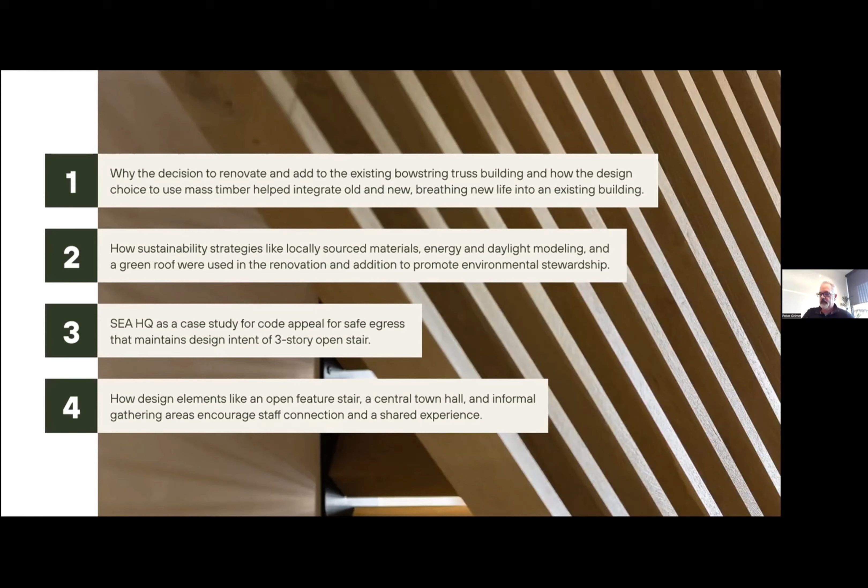So with that said, let's go ahead and dive into the first one. How did we end up where we are today? This was our building in 2006. Prior to that, we started in 1998 as a 2-person shop over in the Pearl District. Our founding partners, Sid Scott and Kelly Edwards.

I joined them about a year and a half later, and we had about 5 folks in a small startup in the Pearl, which we quickly outgrew, and then we moved to the West End, basically downtown next to what's now Providence Park. Go Timbers and Thorns. We were there until about 2004, at which time we embarked on finding a new home and found this building in 2006, moved over. At that time, I think we had about 17 folks on staff.

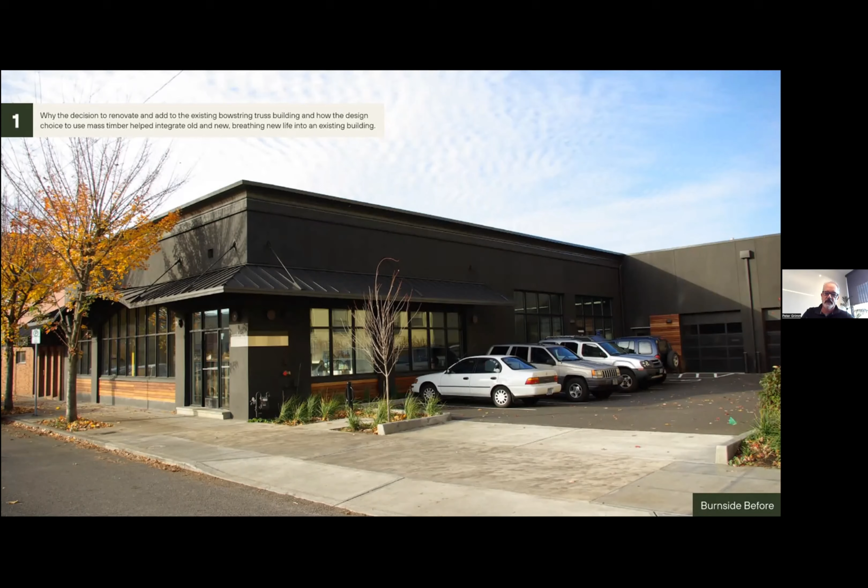The building had been built in the 40s originally, with beautiful bowstring trusses on the interior. I think in the mid 90s there was a storefront project done on the exterior that gave it its character. But really just a cool semi-industrial vibe, which was part of our ethos from day one.

Very comfortable, great light, really great neighborhood, so I can't stress that enough. We're on 26th and East Burnside, just below the Laurelhurst neighborhood. It's a wonderful community of truly mixed use—restaurants on 28th, housing, single family, multifamily, office space. It's just an integrated neighborhood, and we really love that about it.

Over the years we grew. As an industry, we had a bit of a tailwind from post-2008, up through the mid-to-late 20 teens, maybe even up to COVID. So we grew and grew, and by about 2016 we realized we needed a larger home, a bigger shell. We struggled with how to achieve that on our existing site because it was a 1-story building, not a large site, and we really didn't want to demolish this beautiful old industrial shell.

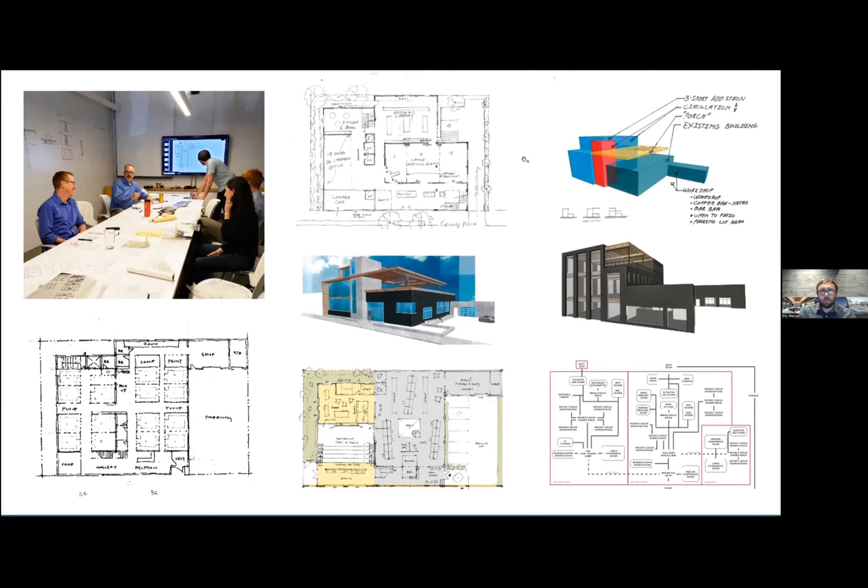So we were happy that we could keep this space, and with the opportunity to go through the wall here and interconnect into our addition, we were really excited about doing that. The design process really entailed going back to those goals and incorporating all the feedback on how these two buildings could interact with each other.

Again, it's like we have the old on one side and the new. As part of the charette, we talked about mass timber and really wanted to use it, though we didn't know what kind. We wanted it to help tell a story between the old and the new, because in the 40s bowstring trusses were really popular, being built all around town, and highlighting this as an advancement of wood technology between the two. We thought that was a really cool opportunity.

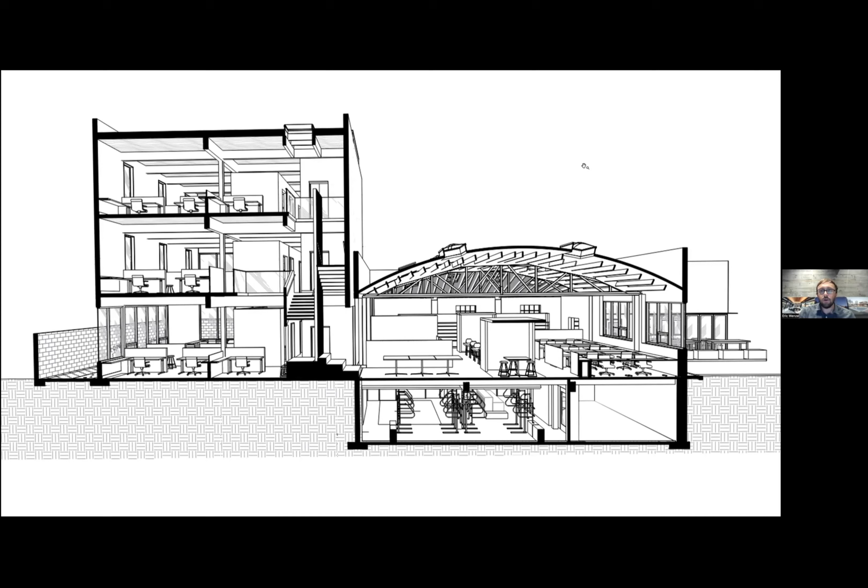So we chose CLT going forward, and got really excited, especially in the planning process. It's really unique in that it's pre-manufactured, and there's a lot of planning and precision that needs to happen beforehand. So I'll switch over to construction.

Through that planning, a lot of the work really paid off, and one was timing. CLT is really sold as speeding up the construction process, and we did see that as part of this. They were setting glulams in one day, CLT the next, and then the next floor would start going up the day after.

And to be clear, guys, we employed a hybrid system—I think Eric mentioned that—conventional post and beam, steel column, glulam, and then CLT floor slabs. Just wanted to mention that.

That was part of the aesthetic, and also we had the flexibility of being a Type 5B building, so we could leave essentially everything exposed, both the CLT and steel. It was nice to have that flexibility within this footprint we were building in.

The challenge there, though, is that if you have two different subs coordinating stuff like what you're seeing right here, you can see how that could be a challenge between the steel sub and the wood manufacturer. They really had to work hand in hand throughout the process, and all the details had to be dialed in.

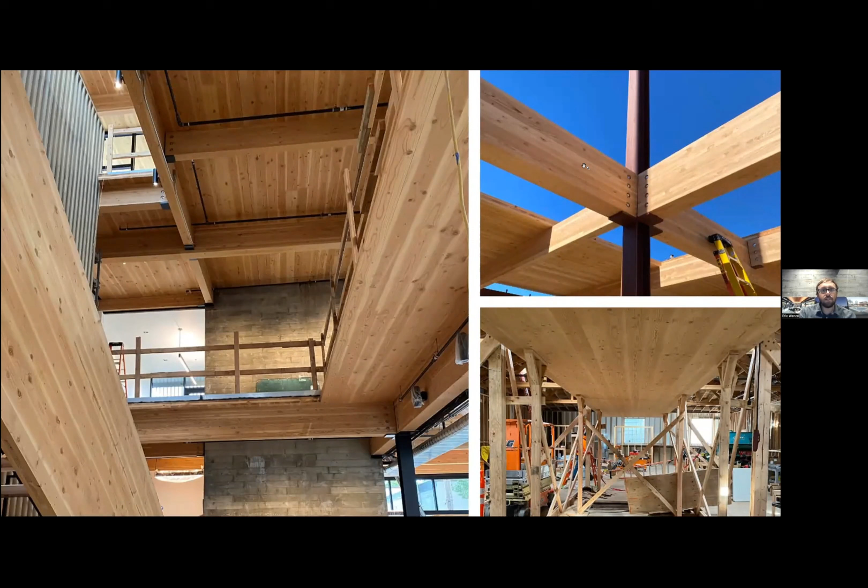But again, it goes back to really planning and precision with CLT. You're being aided by a CNC machine, so it just has to go hand in hand. And it really did that day - it was fun to see everything just snap together like it was planned. We also wanted to look beyond just using the CLT as a floor and roof plate.

Being a laboratory for design, we also wanted to look at where else we could use this. There are all of these opportunities that we have. To the left here, we used a 40-foot CLT panel as our guardrail on one side of the stair.

And then on the bottom right here, we also used CLT as a freestanding structure that we called the spine, located in the center of our existing building. What it does is it breaks up the workstations on either side, and it also creates two breakout spaces and a reception area. It's all made out of 3-ply CLT, and actually the whole building is made out of 3-ply.

There was one area - this one's kind of an interesting story - that required a fire rating. That was the top of the elevator. As a means of getting that rating, we wanted to make that profile as slim as possible. I spoke with the wood manufacturer, and they were able to produce data and documentation that proved it was a two-hour assembly, being 5-ply, and we were able to use it in that fire rated situation. So that was kind of cool - everything showed up 3-ply, and then we had one little 5-ply piece.

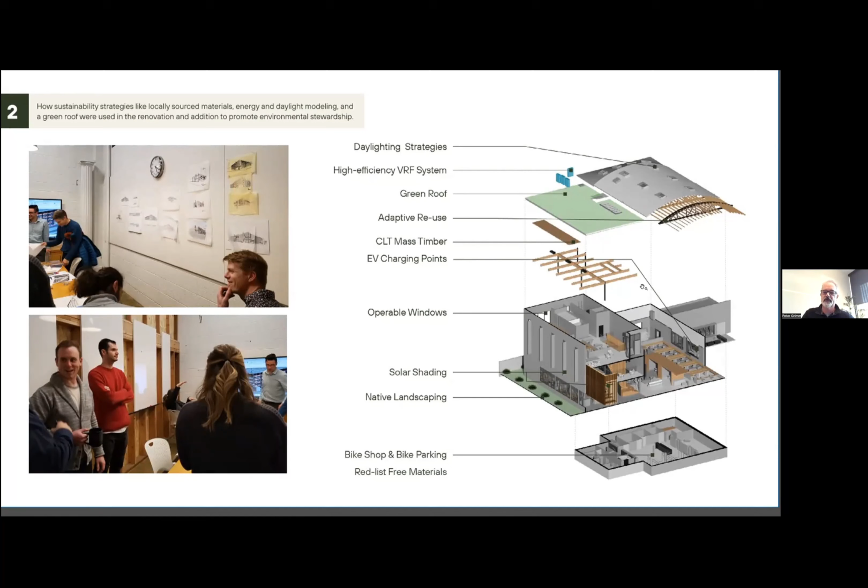Subsequent to our design process, we had a bit of serendipity. We actually took one of the AIA's 10-part series through the AIAU on embodied carbon, and had a bit of an epiphany—we've been involved with LEED since the early 2000s, and we've done everything we can to integrate this into some of our work, typically our public work where it's mandated, or part of the funding requires LEED certification, or Earth Advantage for our multifamily projects. But there was no holistic approach for all of our work.

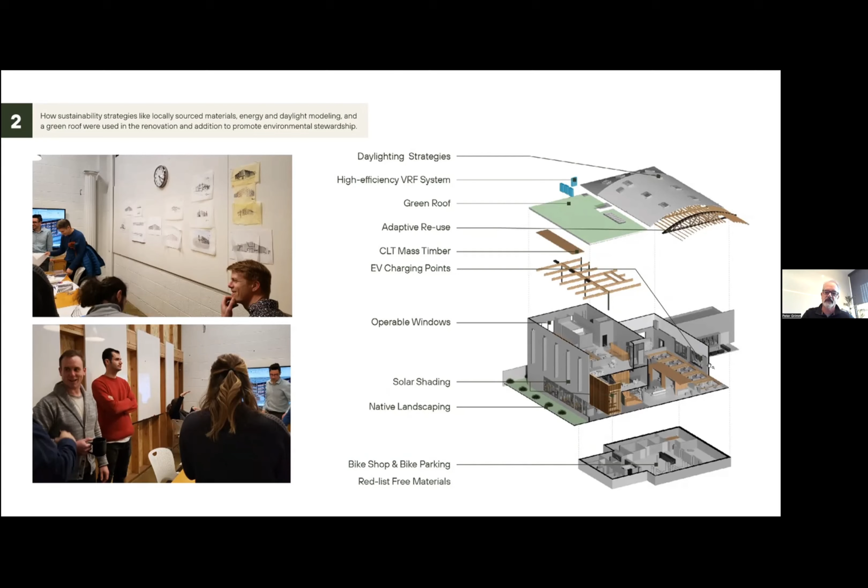Following on that seminar series, we realized we really need to commit to the AIA 2030 Commitment, to give us a framework to really amp up and be consistent with all of our work—looking for opportunities to reduce the impact more holistically across our whole company. That felt like serendipity. Going through the process on our own building, I think, raised our awareness to a really high level, which enabled us to be open to those new ideas as they came basically passed in front of us. So following on that, we realized we're going to need someone to manage this. We're committed, we're on board. We're a little late, but we're in the race, and we're really proud to be part of that effort.

So we hired a full-time sustainability director who came on board within the last year, so it's pretty recent for us. Mea culpa, but we're really excited. She's setting a great tempo for us to evaluate not only the work we've done already, but we're doing a life cycle analysis on this project to compare it to a ground-up build, which I think will be fascinating. Can't wait to see the results in terms of both embodied carbon and operational carbon. We're also exploring on-site PV generation and some other strategies.

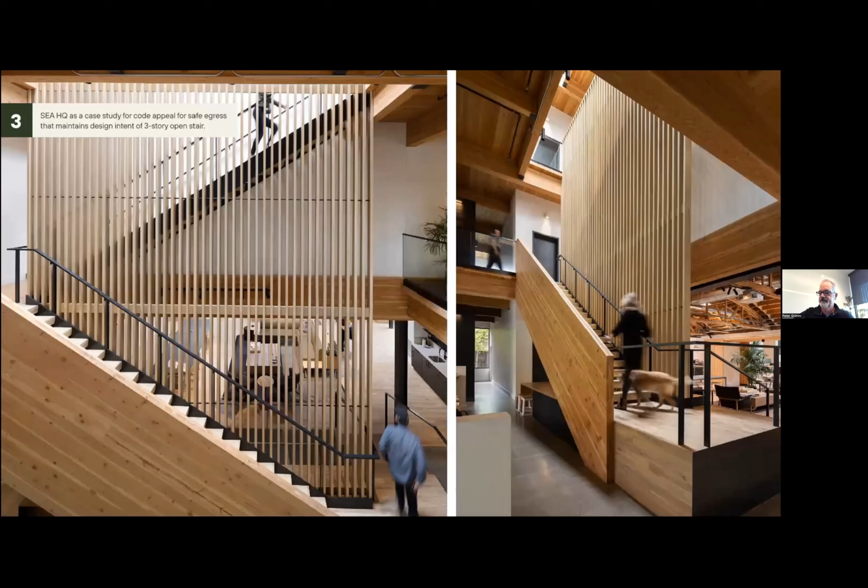Okay, so our third module - how are we doing on time? I think we're doing good. This was an interesting case study that we thought we'd share with you guys, kind of unique to this project in our experience.

We've done many office design projects over the years, and typically for a 3-story office, you can interconnect any 2 floors with a nice feature stair, no problem. If you had a larger footprint with 2 stair enclosures, that 3rd stair is really just ornamental. In this case, our footprint was 50 by 100, and we needed a 10-foot setback on both the side and rear, so really it's a 40 by 90 building footprint.

You can imagine there's not a lot of room left for program once we have that. If we had to put 2 enclosed stair cores all the way up, it just doesn't work on a site that small. As we mentioned early on, our central design brief was to maintain connectivity and restore the connection between groups, between studios. We felt strongly that this central vertical element, this atrium space, was pivotal. So we thought, is there any path to demonstrate we could have 1 enclosed stair and 1 open stair going 3 stories?

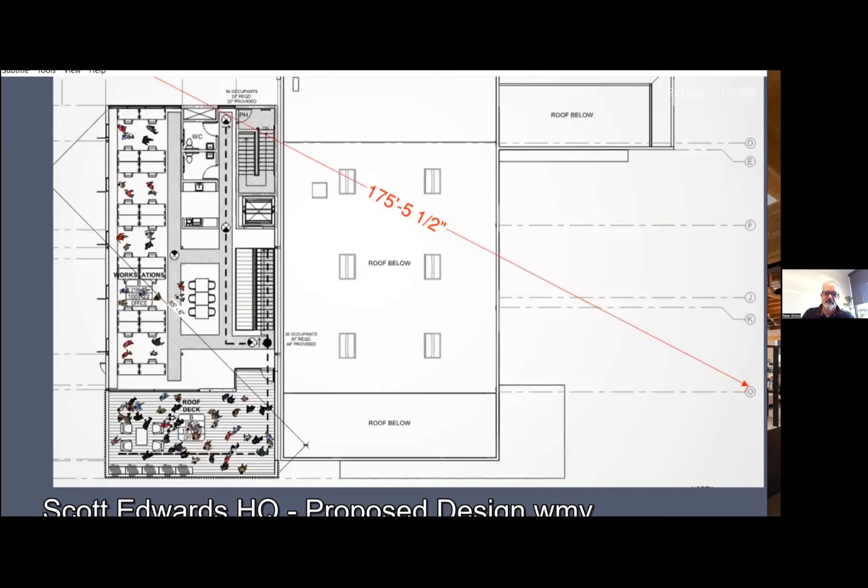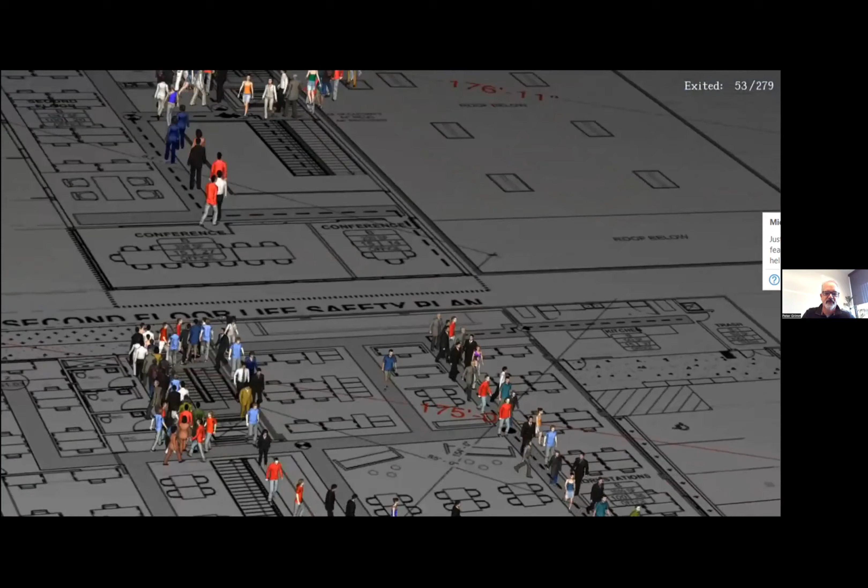It's kind of like Keystone Cops with these little sims, and it's a little herky jerky here, but you can see they're generally exiting. There's some on the roof deck, they're going down the stairs. Some people are having a hard time getting out of the conference room, just running into each other or walking in circles. I don't know if it's a perfect science, but generally they're remarkably calm in an emergency, which is nice.

And what you're seeing on the top right is how many people are exiting within the time frame, and you'll see the time frame at the lower right. What they did was compare the videos in real time, side by side, with the Board of Appeals.

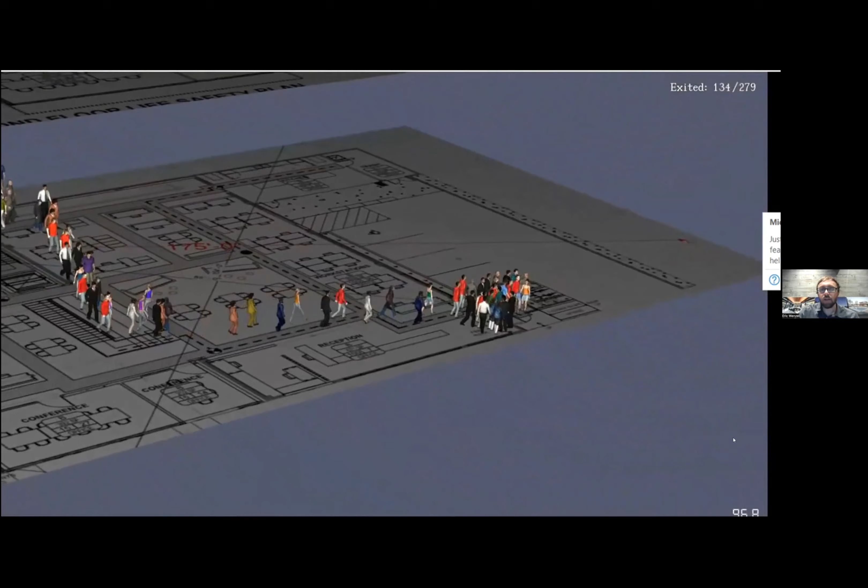So in order to get there, we had to go through an appeal process three times, and after the third time, they recommended to the highest Board of Appeals, which is called the Big Board. The Big Board consists of three members who were used at the time: an architect, a contractor, and a representative from the city.

What they do is hear your case, and at the end they do a vote. In our case, we won the appeal on a 2-1 vote. Yeah, it's a slim margin.

But anyway, we just thought that was kind of fun. We had never gone through that kind of empirical analysis before, but they were able to demonstrate that, in fact, you could egress within the same amount of time it would take to egress an equivalent enclosed stair. So kind of cool, just thought it'd be fun to share.

So what's the takeaway there? Well, maybe if you feel like you have a situation where—I know most of us on the call have done probably umpteen code appeals for our clients, and a lot of times they're fairly routine—this one was kind of a rare bird.

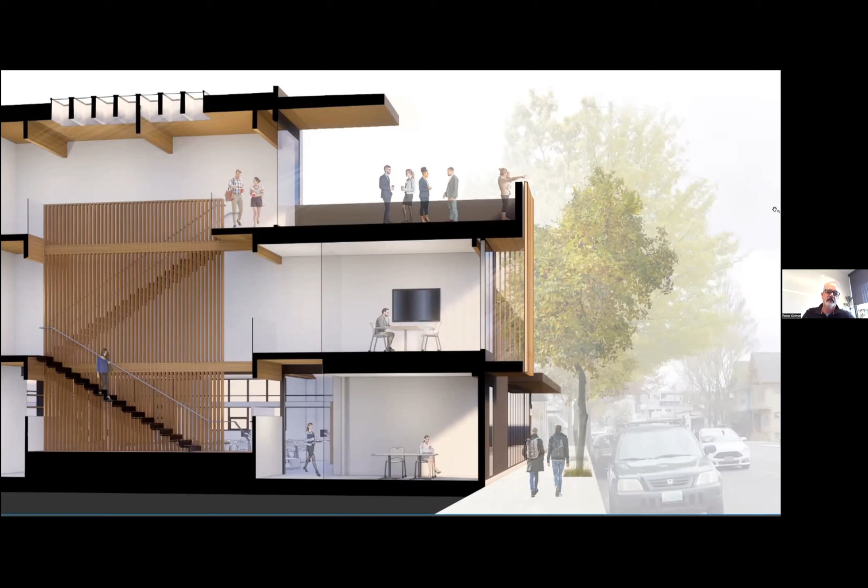But again, we felt that it was inherently safe. And I think maybe the takeaway is, if you feel like you have a situation where, in your gut as an architect, knowing what we know about what's essential to life safety, it feels inherently safe and you can demonstrate empirically that it is, maybe consider going that route. In this case we were successful, and I think we got a really wonderful spatial element out of it and still maintained a safe building. So that was a really good experience for us.

Okay, so we're down to our final module, lessons learned. Hopefully this has been kind of interesting for you guys. So I want to pan out a little bit and say, what were the broader lessons here that would be useful for you guys in terms of our overall experience.

I'd say number one, recapping a little bit of our process: listen to yourselves. Tap that deep knowledge within your company, or if you're working on behalf of your client, find out what you've got—nobody knows more about your business than you. This is the opportunity to put that to use, and if you're willing to experiment, you can come up with some really neat solutions. I think workplace design will probably continually evolve, and using the office as a kind of laboratory has been a really wonderful experience.

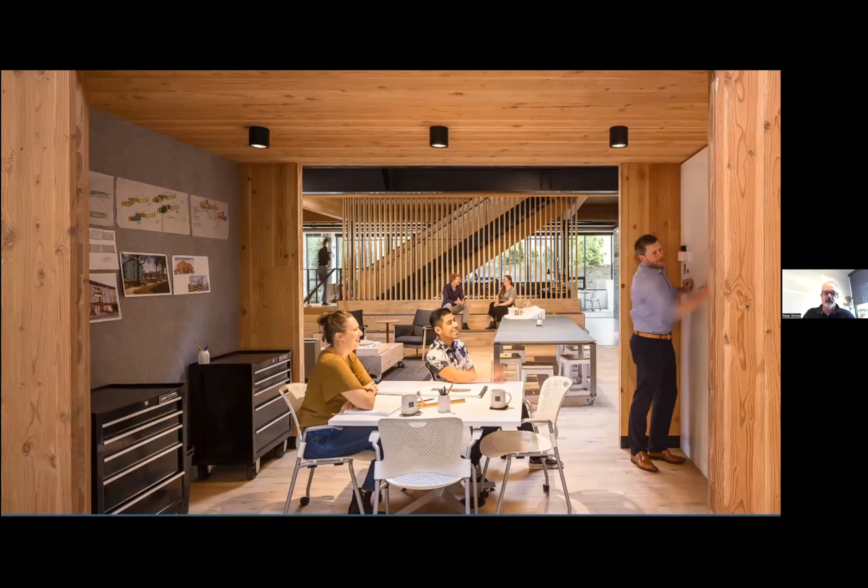So that's number one. Maybe number two, opportunities are all around us, right? So for example, in our case this was an adaptive reuse project. For a project like that, is there a way to rethink how your space is organized to better serve whatever your central design goals are?

Prior to this, we really didn't have a big central town hall meeting space, and so we really wanted to put that front and center. Designing for connectivity and warmth, and ultimately trying to create a comfortable, compelling place to come to work, was really a fantastic process for us. So, looking for those opportunities—they might be right in front of you.

Details matter. Typically when we work for clients, we're under the gun, time pressure, we never quite have enough fee. It's more like time runs out, pencils down, time to move on. This was maybe probably a once-in-a-career opportunity, to design our own space to this level.

If you ever get that opportunity, take the time to investigate solutions to the little things that don't work as well as they could, and take that time, because it's a bit of a luxury. But again, we wanted to explore that.

Everything from workstation design, desk heights, spacing, monitor, the tech, the hardware, access to common resources, and proximity to those informal collaboration spaces, those soft seating groups, those small breakout spaces, those Zoom rooms, and making that easy and accessible has really resulted in a very functional workplace for us. So don't forget about those.